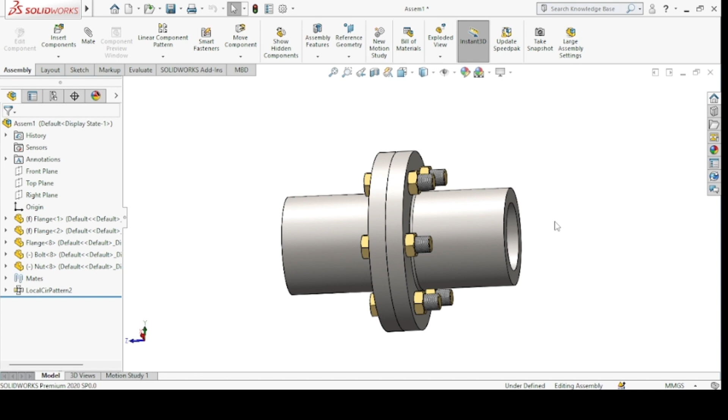We have an example in front of us, the flange coupling. This assembly consists of three parts: first the flange, second the bolt, and third the nut. First we will make each part individually, then assemble all the parts. Now we will start by opening a new part.

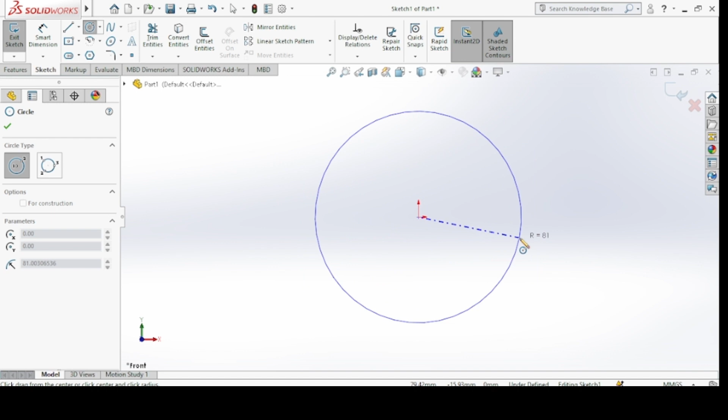We will select the front plane, go to normal, then select the sketch command. First we will draw a circle with a dimension of 220mm. Then go to feature and click on extruded boss, and give it a thickness of 22mm. Click OK, our part is ready.

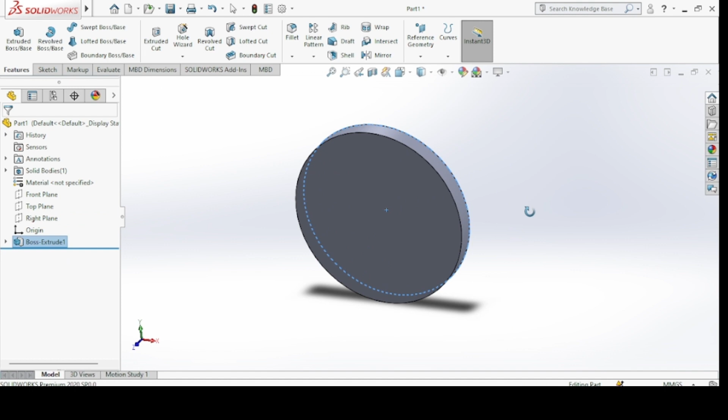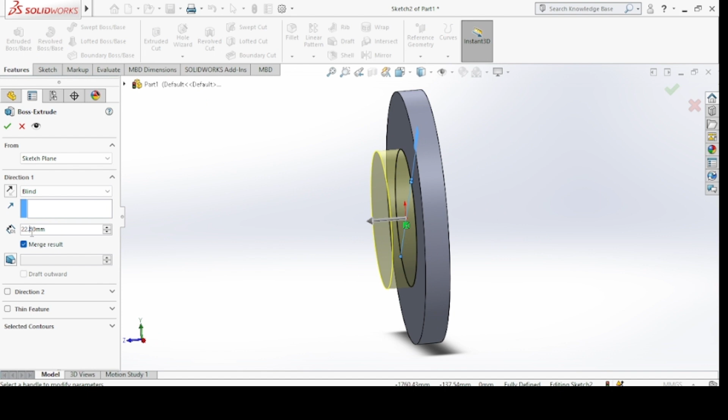Now we will select this portion, go to normal, select sketch, draw a circle with a smart dimension of 120mm, then go to extruded boss and give it a length of 120, click OK.

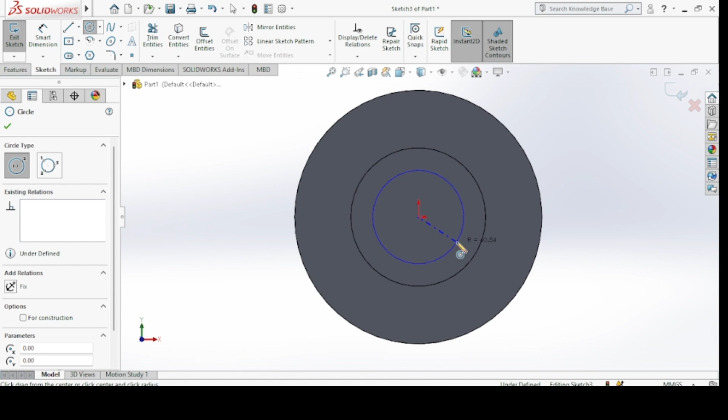Then again select this part, go to normal, go to sketch, go to circle, draw this circle, go to feature, extruded cut, select through all and click. So we can see the half part of the flange is complete.

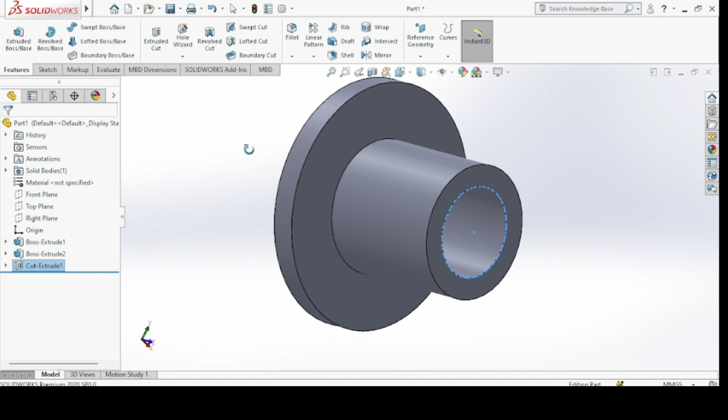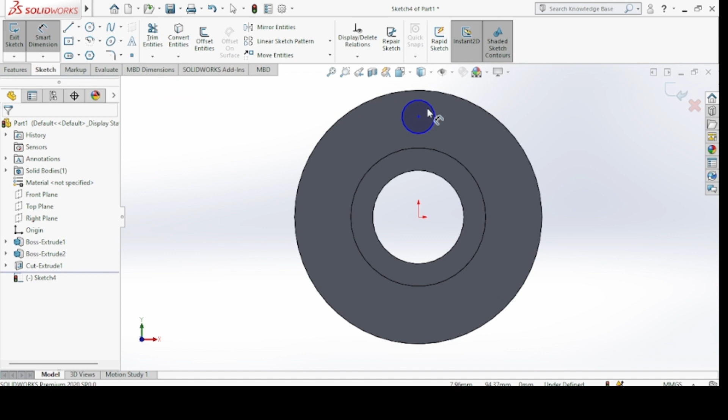Now we will select this portion, go to sketch, draw a circle here, give it smart dimensions of 20mm and 85mm. Now go to feature, extruded cut, through all, and select.

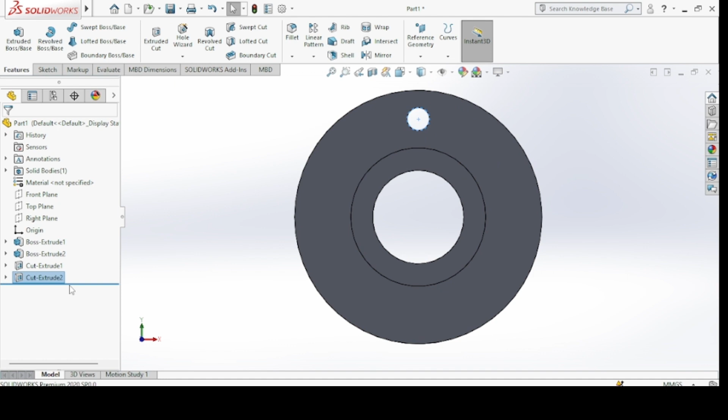Next go to circular pattern, and we have to draw 6 circles at equal spacing. Select the plane and click OK. Now we have this flange coupling, and there is one more thing: click on fillet, give 3mm fillet to this portion, click OK. So our part is ready.

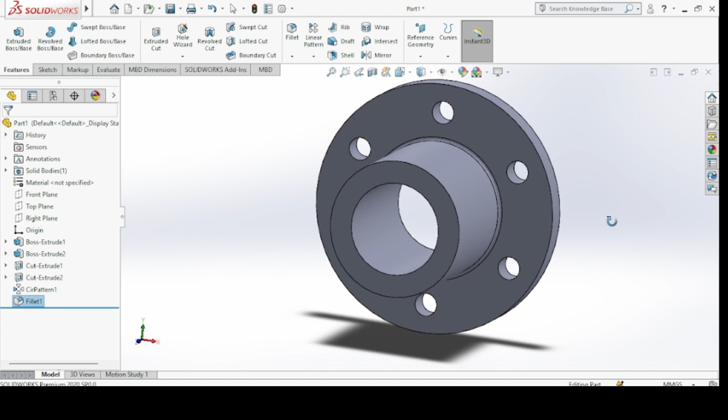Now select the part and go to appearance, select metal, and we will select polished steel. Click on this and our part is ready.

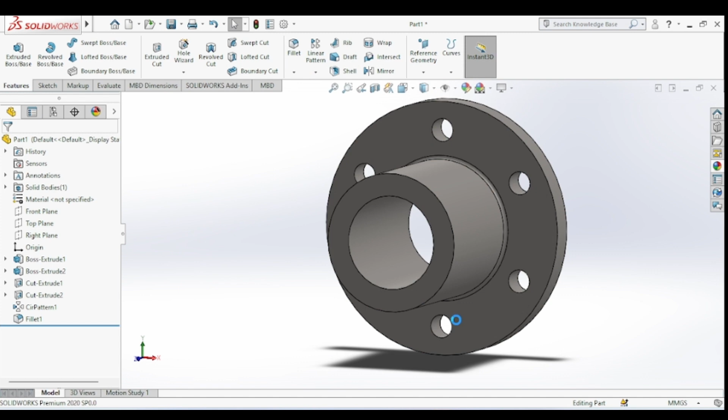Now save file, save as part 1, that is flange. Save it. Now our first part is complete.

Now we will make the bolt. Select new part, select the top plane, go to sketch, go to normal to sketch.

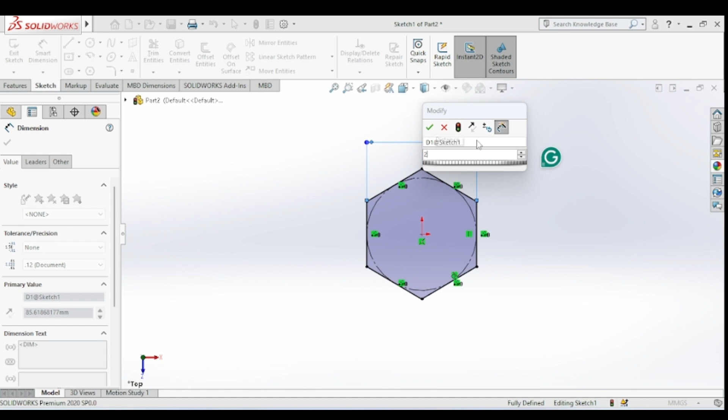Now select this line and make it vertical. Select smart dimension, 28mm. Now go to feature, extruded boss, and give it a thickness dimension of 12.

Click OK. Now select this portion, normal to, go to sketch, draw a circle here, select this portion and click on tangent. Now go to feature, extruded cut, click on flip side to cut, then give angle 60 degrees, click OK.

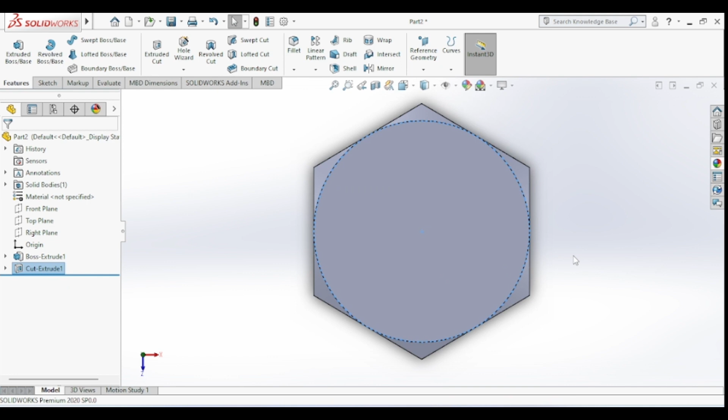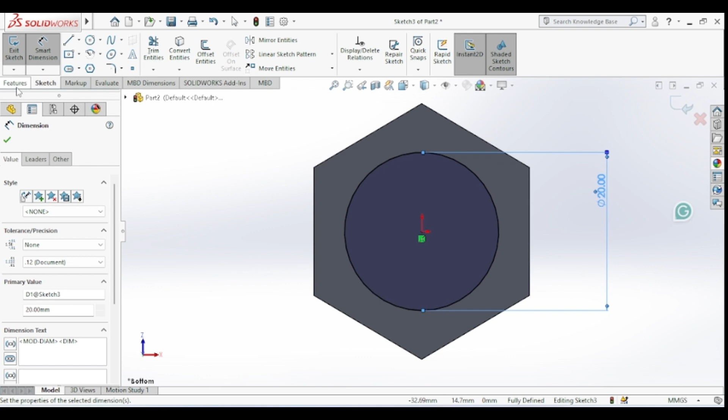Now select the bottom part, click here, again draw a circle. This circle has diameter 20, then extrude this circle up to 75 length. Click here.

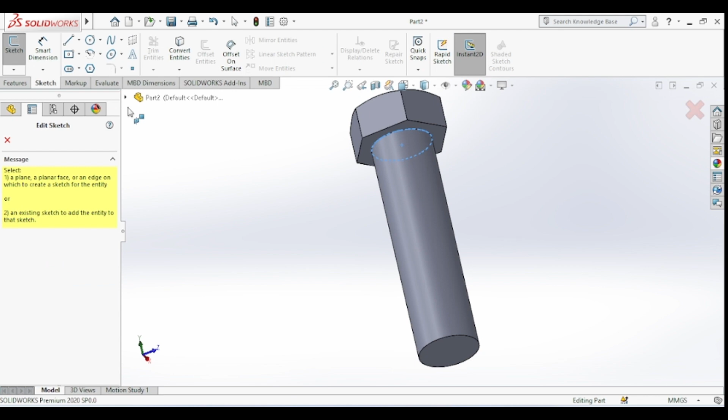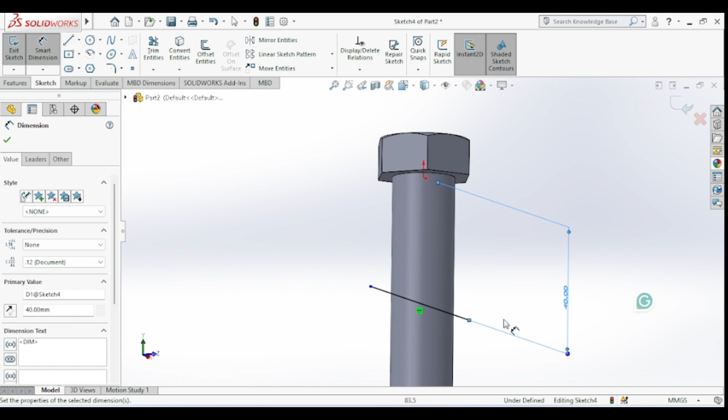Now go to sketch, select the plane, front plane. Now draw a line here, take the smart dimension, it is 40 gap. Click OK, then go to feature, curves, split line, select this plane, click OK. So you have this part.

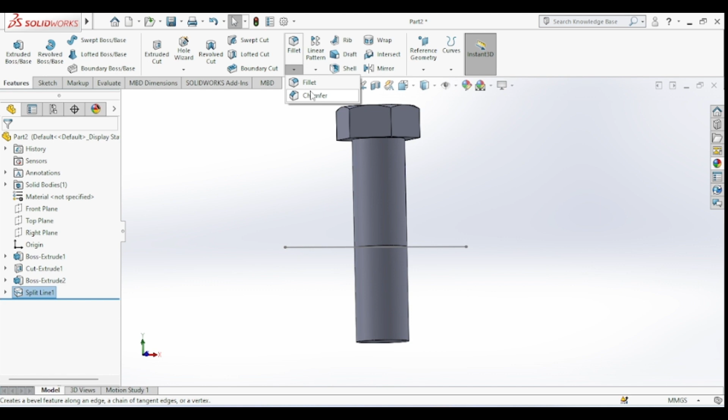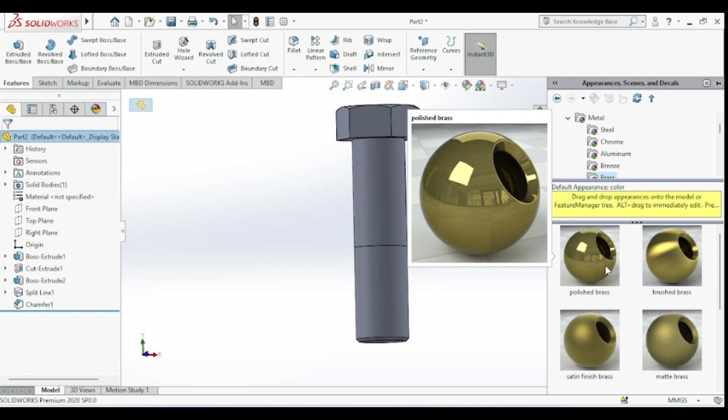Now again go to chamfer, give 1 to chamfer, click OK. Now go to part, go to appearance, select metal, select brass, brushed brass, OK. Now select this portion, again go to appearance, go to miscellaneous, select pattern, go to screw thread. So our bolt is ready now.

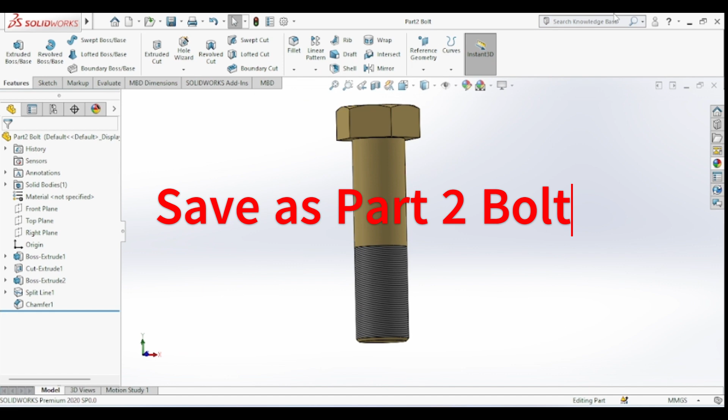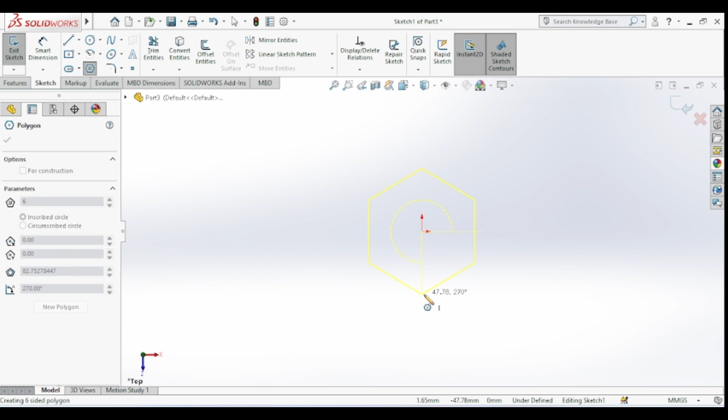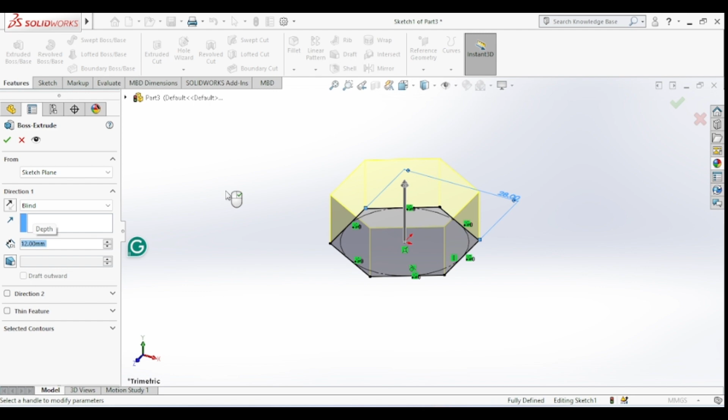Select OK. Now again select the top plane, go to sketch, go to hexagon, draw a hexagon here, select this and make it vertical, go to smart dimension, 28. Now go to feature, extruded boss, this thickness is 12.

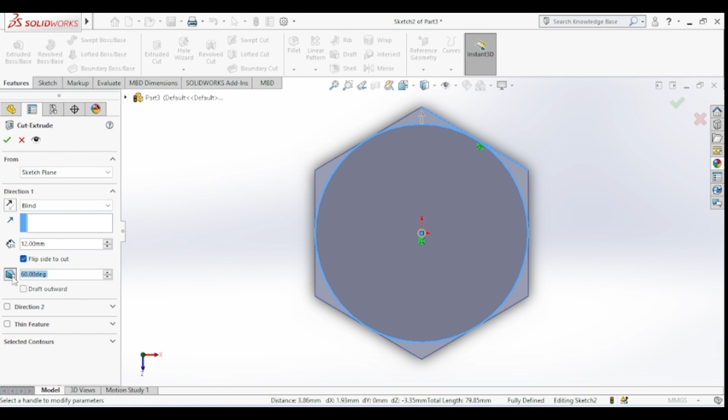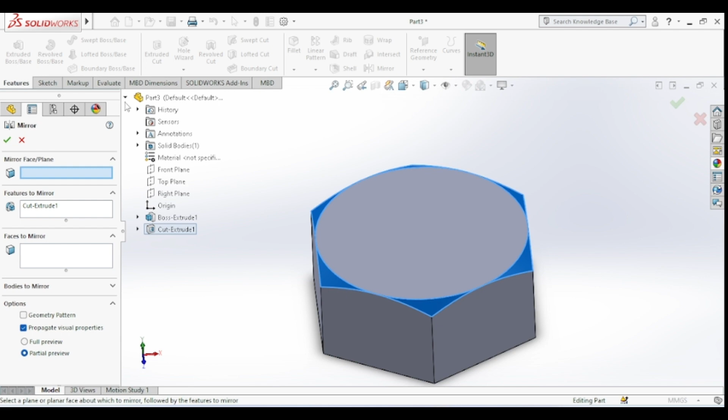Click here. Now select this portion, normal to, sketch, go to circle, make tangent, again go to feature, extruded cut, flip side to cut, angle 60 degrees, then select. Now go to boss extruded, edit it, and take the plane as mid plane. OK. Now cut extruded, this portion, mirror it, select the plane, top plane, click OK. So this portion is ready.

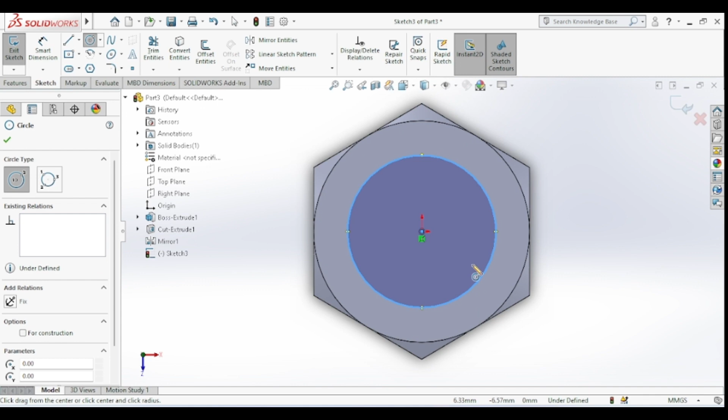Now the next thing, click here, go to sketch, draw a circle, give it dimension 20mm, and make extrude cut through all. So this portion is ready.

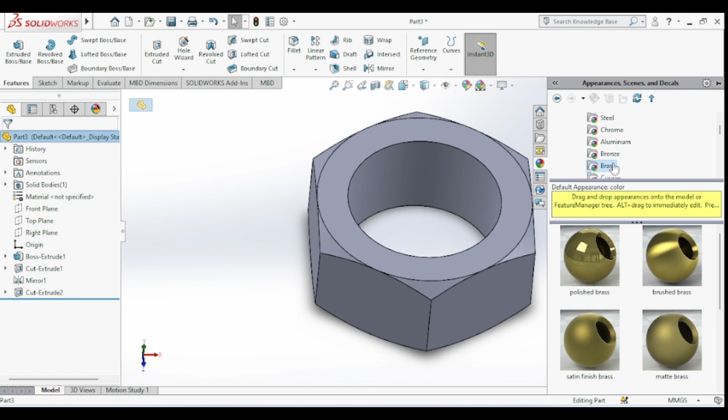So again go to part 3, go to appearance, go to metal, select brushed brass again. Now select this portion, go to miscellaneous, go to pattern, select screw thread. So this portion is again ready. Now save as part 3, bolt.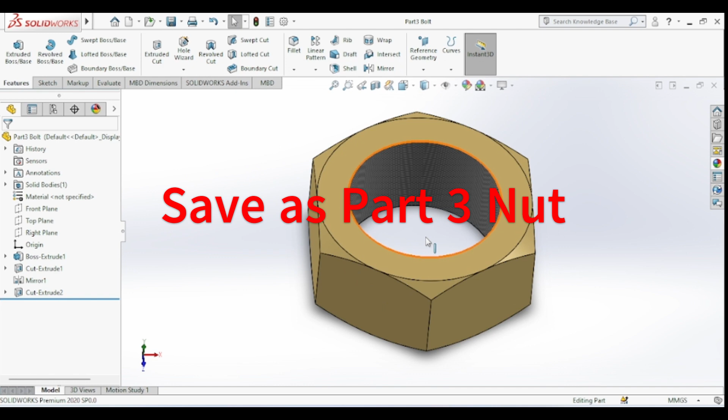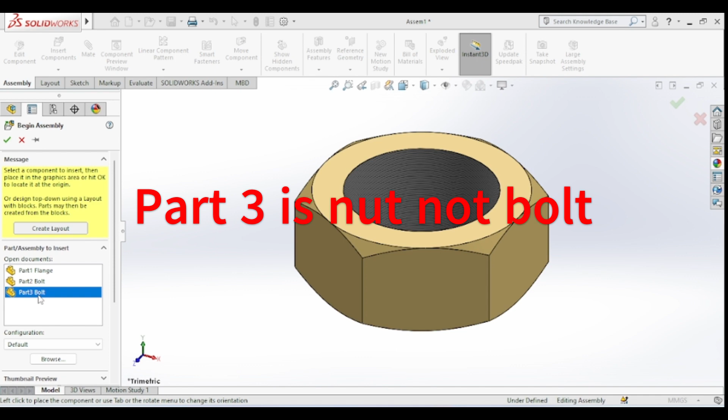Now we need to assemble these 3 parts. Click new, go to assembly, click OK. So these are part 1 flange, part 2, part 3 - the third part is our nut. We have to change the name, part 3 was nut, not bolt.

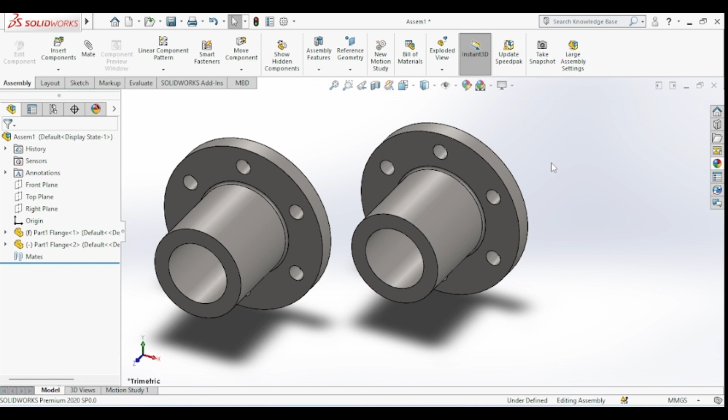So first we will select the flange, first flange. Again we will select one more flange. Now this is the position of our flange.

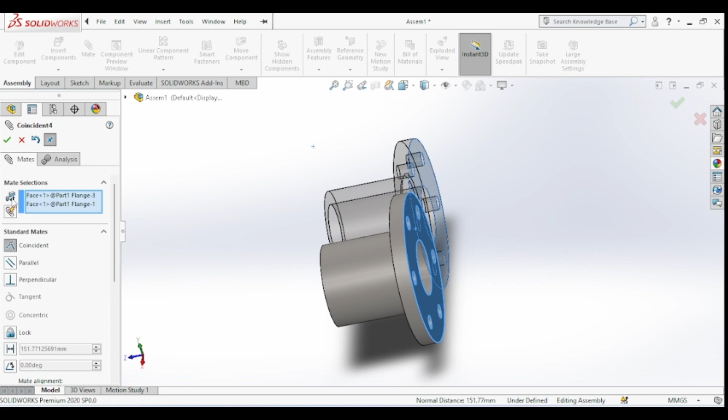Now we will make the different parts of flange align. We need to match these 2 portions, first this one and this one. So select this portion and this portion and go to mate, click OK.

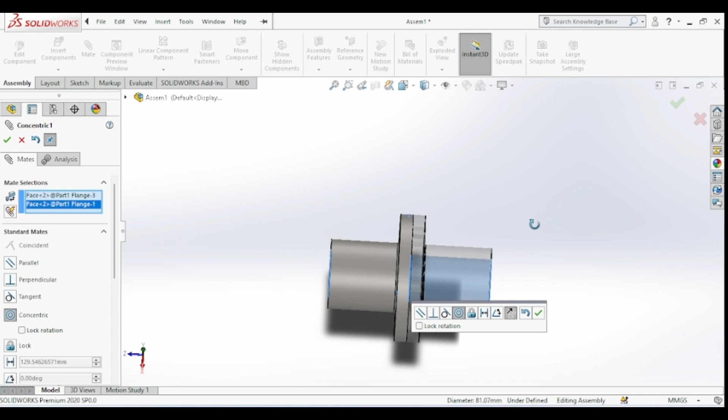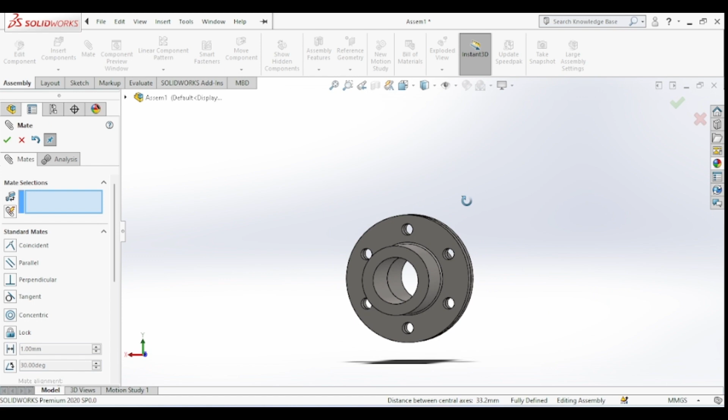Then we will select this portion and this portion and change the direction. Now the third thing is we have to mate this hole with this hole, mate, and click here. So this first assembly is ready. Now click OK.

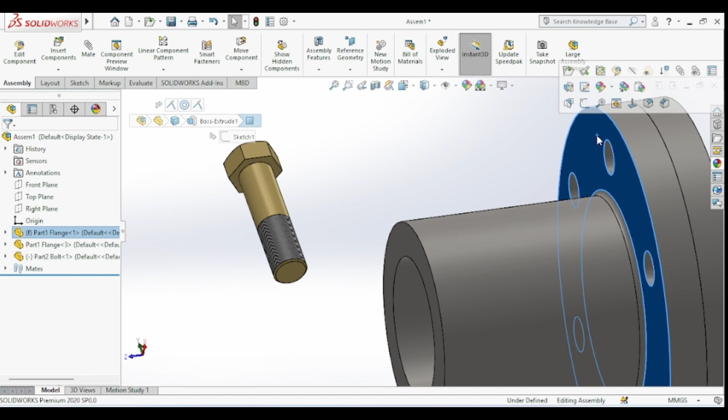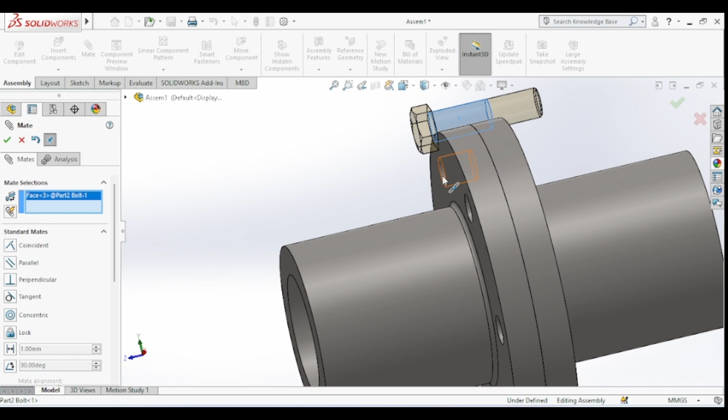Now insert component, we will insert the bolt here. This surface with this surface and mate it. We need to select this one and this one, so you can see here. Now the second thing is we need to mate this one with the inside surface. Okay, this portion is complete.

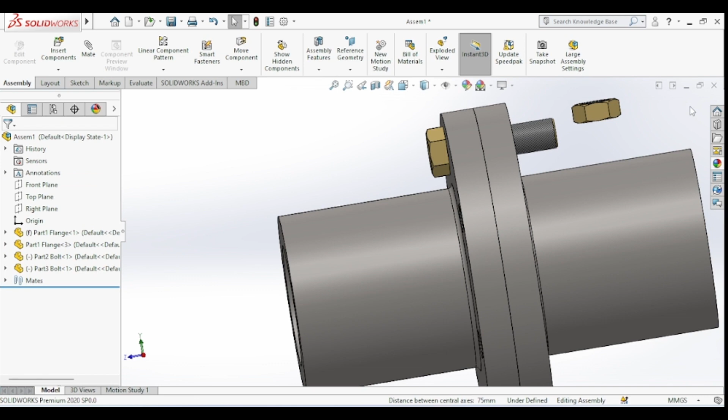Click OK. Now again insert the third part, that is the nut. Now click this portion and this portion and mate it. Now we have to select this surface and this surface. So one nut-bolt arrangement is complete.

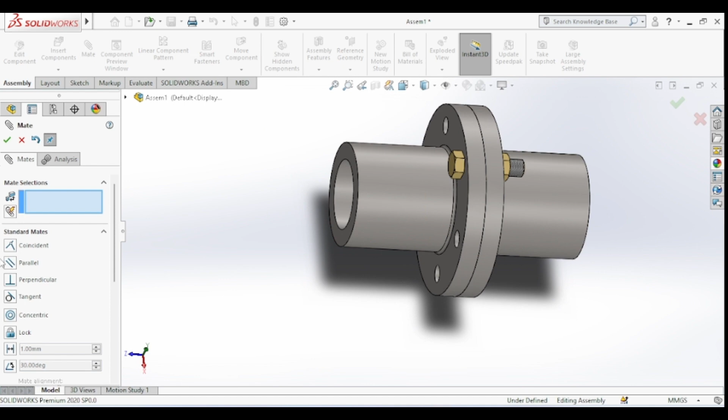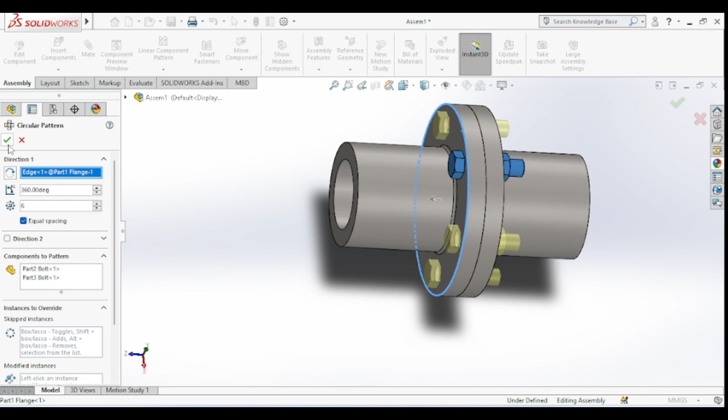Click OK. Now go to circular pattern, select this bolt, and we have to make 6 nut-bolt arrangements here. Select the component, select. So in this way our assembly of flange coupling is complete.

So it's a very simple procedure we have followed for making this assembly, and we have chosen this assembly because it is very simple. You can use similar dimensions because these are calculated according to the design book, with all the formulas given, and you can choose similar dimensions and practice this flange coupling. Hope you like this video.